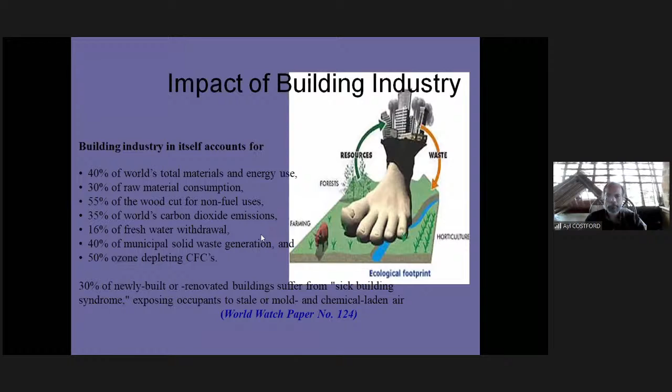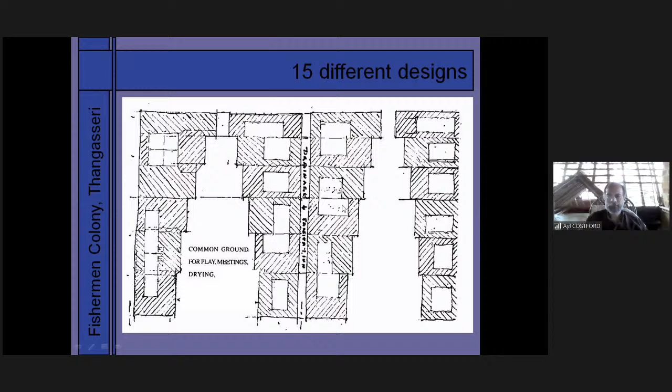We made a model. This is the model we made in small cardboard. You can see the sea here, and also all these houses are open to the sea. You can see this. And he made the first designs, and then asked us to make the models. First, he made 15 different types of houses and put it here.

This model we made in 1 in 200 scale. Sorry, not 1 in 200, 1 in 100 scale. Then he asked us to make each house in 1:20 scale. We made the models for the 15 houses.

Then we discussed with the district collector there. Actually, the project was under the district collector, and he was a very cooperative person. Laurie Baker himself came to the site, and only then he made this proposal. Then all our COSTFORD people, including interns, made this model.

Then we asked the collector to call a meeting for the beneficiaries. When the collector conducted the meeting, he called all the people. It was 158 houses, and 158 families were invited to an auditorium near the collectorate itself. Then all the people came. Laurie Baker insisted all the ladies had to participate in the discussion.

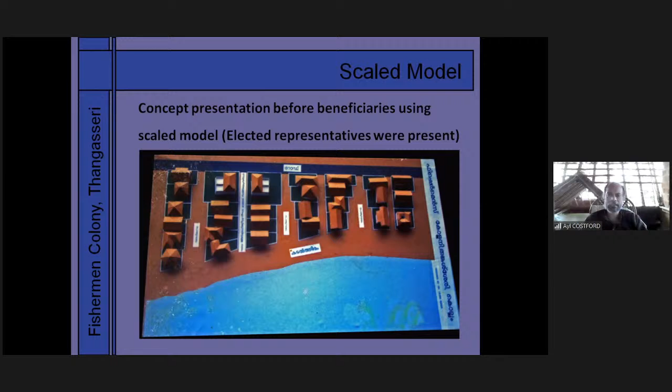Then Laurie Baker suggested some new methods of making the foundation there, because it is very close to the sea, and it is very difficult to make the foundations with steel. These were taken while the construction was going on; Laurie Baker was also visiting that area. That is the picture of that. This is a very old picture, that's why the photos are like this. I have scanned it and made use of it.

Actually, Laurie Baker proposed a bamboo reinforced surface beam. Because it's a government funded project, it would be very difficult to use bamboo instead of steel there. But Laurie Baker insisted. He wanted to collect all of them and explain what the problem is.

That time we also called local politicians and other political leaders, the member of parliament and member of legislative assembly. The collector invited all of them, they all came, and we had a discussion. We explained the advantages of bamboo and the disadvantages of steel.

I thought it would be very difficult to convince them about the bamboo. I thought they were not going to accept it. But surprisingly, when we explained to them the good qualities of bamboo and the demerits of steel, because it's being on this sea sand, you can also see the sea sand in the picture.

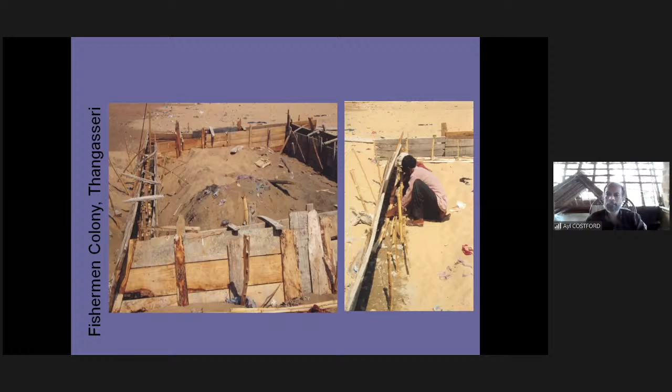And we did the entire foundation beams with bamboo reinforcement. All the clients, all the beneficiaries agreed to use bamboo there. When the beneficiaries agree, there is no question about all others. All the politicians also agreed, and we smoothly carried out this foundation work.

You can see these buildings here. We completed 158 houses there, and these 158 houses are in 15 designs. And people started living there happily. This was completed in the year 2000. It started in 1997 and finished in 2000. We completed it.

Now, these are the 2015 photographs. Many people upgraded their houses. Many of them took a first floor on top of the ground floor, and many people expanded their houses.

During that time itself, when we had the discussion with the beneficiary group, they conveyed their requirements to us. Then when they got the chance to extend, all the houses were extended. You can see the houses after 15 years of the construction.

People are using the area wherever we planned common land, and nobody encroached on that land. All of them are using it as common land. They are mending their nets there, keeping their boats there, drying their fish there. It is all happening.

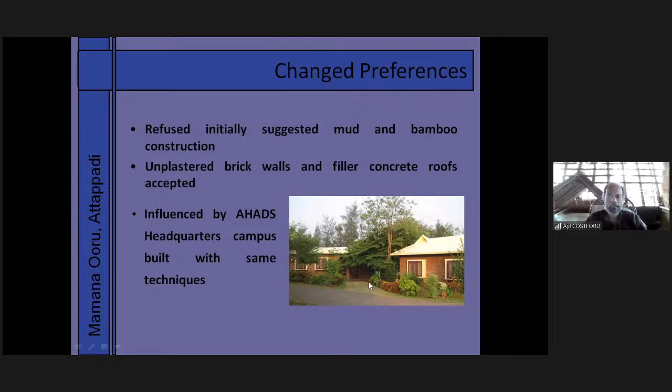And all houses have rainwater harvesting tanks in the base, in their foundation itself, in their plinth. Within the plinth itself, without doing the filling inside the plinth, we converted that into a rainwater harvesting tank and plastered it inside. And soil conservation also happened.

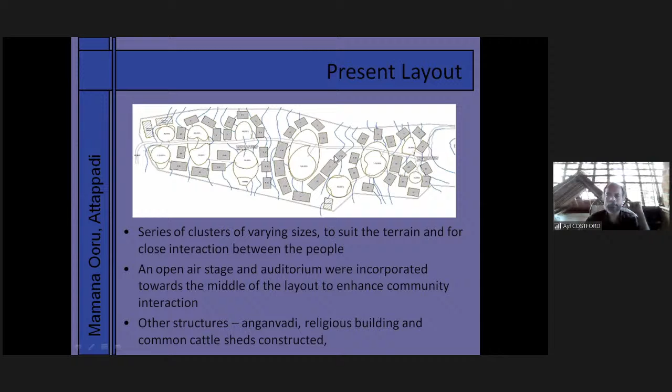A series of open tanks, and you can also see the contour lines in between these houses. It is all going up, and when this tank is full, its overflow will come to this tank. From its overflow it will come to this tank. It's like that. All tanks are fully connected. These all are the tanks. You can see this is one tank.

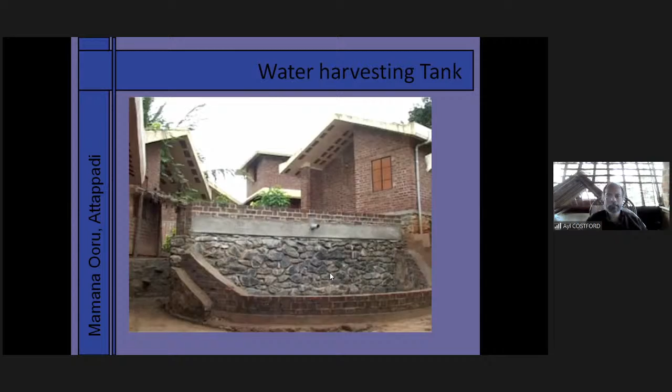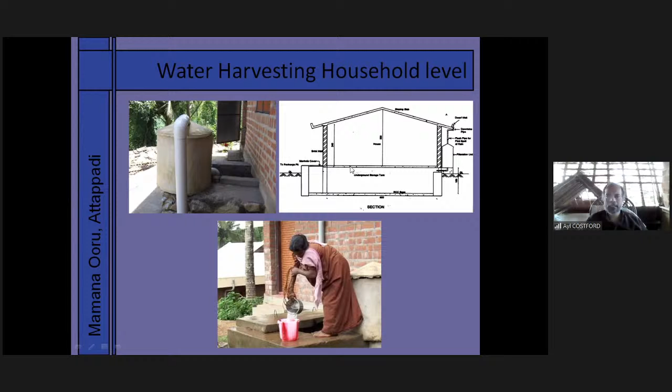This is another tank. Its overflow comes to this tank, and people are using this water. This is the underground one; this water is meant for drinking, and the exterior tank is for the other utilities. Also, you can see how we provided the rainwater harvesting tank inside this house. This is that rainwater harvesting tank.

Rainwater conservation, all these things are common things. We also provided a nutrition garden with lots of planting; we planted fruit trees also. We provided a common cattle shed, and in each house we provided a smokeless chula also. The common cattle shed was a new approach because they had to keep their cattle on the lowermost portion. This is the common cattle shed, and the owner may be living here on the top, but he need not take his cow to the end of this area. He can keep them here.

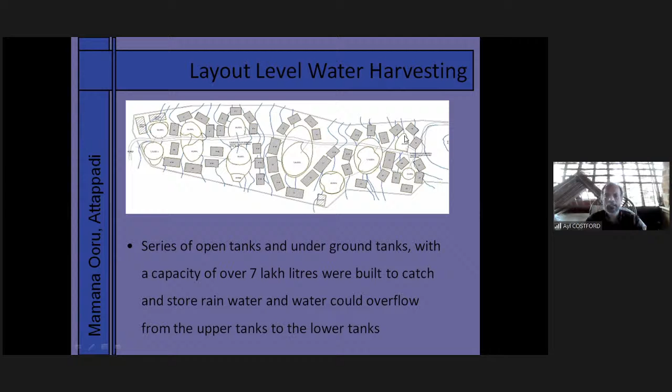The main idea was how to improve the living condition of these people. They were struggling with water. Now they have plenty of water near their home itself. Then these are the tribal hamlets. First we completed this with the fisher folks. Now tribal hamlets.

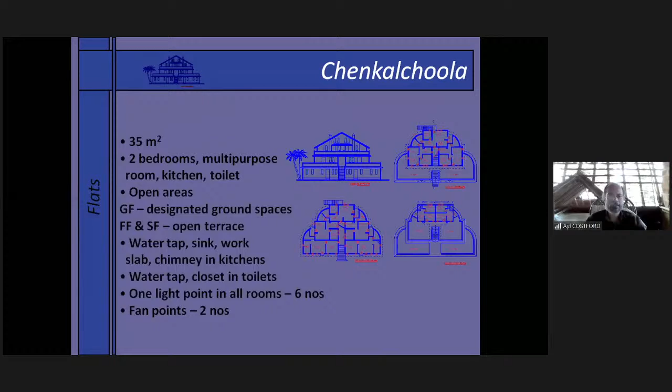The third one is the slum project, Chenkalchoola near Trivandrum. That was also in a very, very dilapidated condition. You can see the condition of the houses. This Chenkalchoola project is actually a failed project. We cannot call it a successful project. We completed the houses. You can see this. Laurie Baker designed the house. This is actually Laurie Baker's design. We completed it.

It's a stepped design. You can see on the ground floor it is 5 houses. Then on the first floor it is 3 houses, and on the second floor, another two houses. This is the system of the houses. In total, one unit is 10 houses. That was the design. The first floor people can make use of the terrace in front of them. Both can make use of the terrace. And on the second floor also, those people get terraces in front.

This is also a Laurie Baker concept, because people who live on the ground always prefer to live on the ground. They don't want to go up. When we approached them with this suggestion, they accepted and started living in these houses. But actually, there was not much interaction with these people. Wherever we don't have interaction with the people, the project will not go. We cannot call those projects very successful.

Still, after completing these buildings, many anti-social people just barged in. Nobody allotted these houses, but these anti-social people just barged in, and we could not do anything for that project. That's why we call it a failed project. You can see this. They are not keeping these houses very clean. Also, you can see posters everywhere on the house itself.

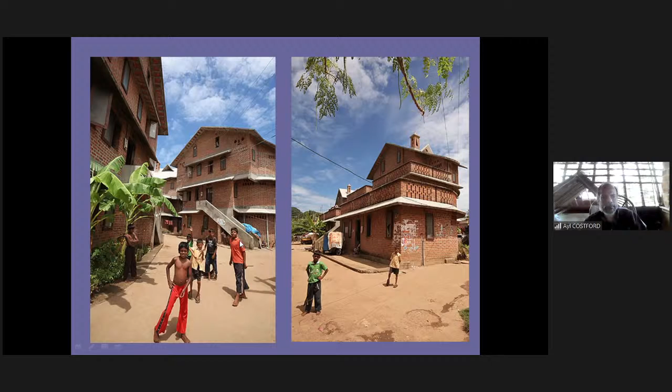In front of the house also, they are not keeping this well over there. When we got the chance to do the second slum, we got a chance to design 26 slums in Trivandrum, and we decided to take up this project, this Karimadom colony, as a part of our direct execution. All the other slums we designed, and others were doing it. And this one we decided to do ourselves.

Its total population was 2,341. And Laurie Baker made a small concept on how to eradicate slums. "Are Slums Inevitable?" was the book's name. He made a small booklet on it. That was in 1996; COSTFORD published that booklet.

Very, very poor condition. 565 families were there. And don't compare the North Indian slums with the Kerala slums. Kerala slums are very small in size, but the conditions are very poor. Size-wise, they are very small.

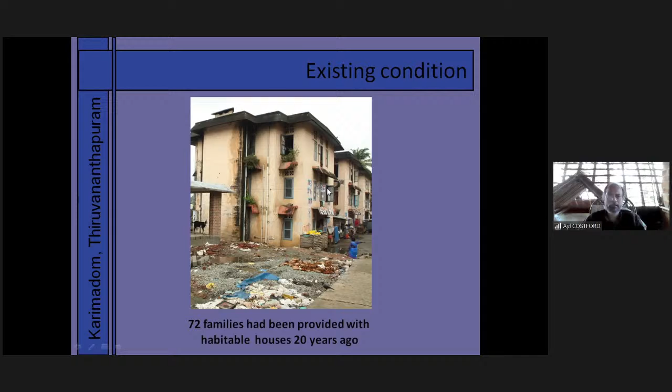Now this building is also demolished and new houses constructed. It was provided in 1985, but that is also in dilapidated condition. And there was a sewage pond, which is under the custody of Kerala Water Authority. They were the custodians of this pond.

The total area of this slum was 9 acres, and out of these 9 acres, 2 acres was used up by this pond. In our detailed project report, we decided to conserve this pond, clean it and make use of it for other purposes. And we designed the houses around this pond. That was our conceptual design.

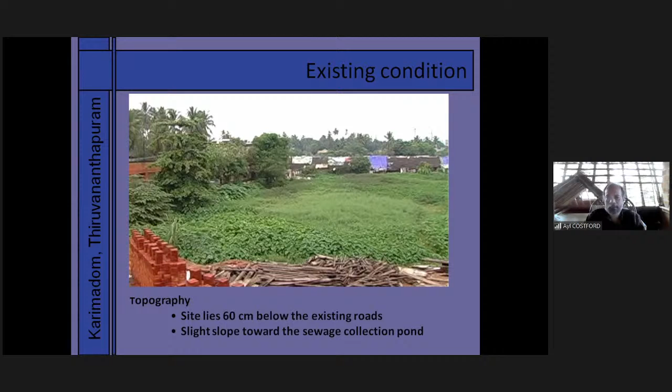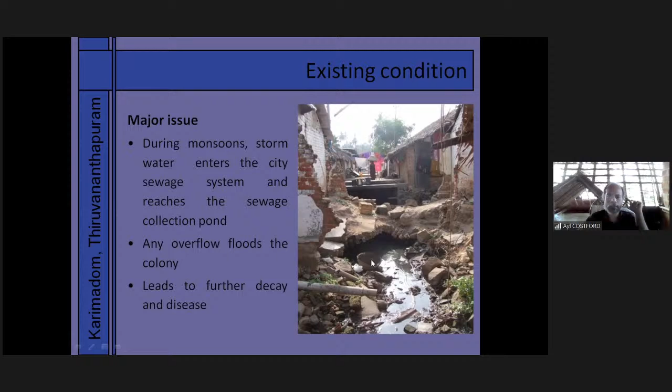And this is another issue. All the sewage is open sewage, and it was flowing through the middle of this entire slum. That also we have to cover up. And these are some of the pictures from our Laurie Baker booklet. This one, a 20 dwelling unit, 4-story block, we designed from these sketches. In the sketches it is all on one side; we made it sloping on both sides.

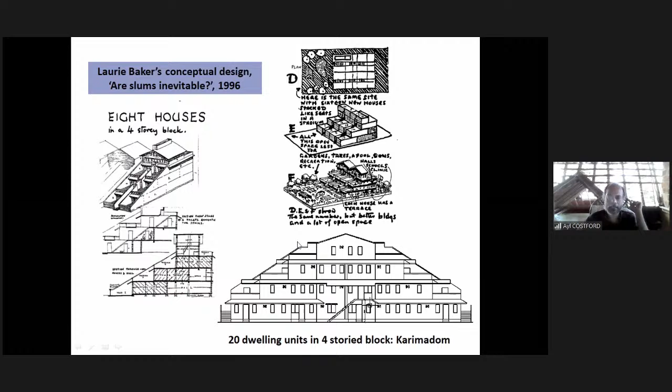This was the design. Here you can see the staircase goes through the middle from both sides. On the ground floor, there are 8 houses. You can see one house here, another house here, another here, another here. Total 8 on the ground floor, 6 on the first floor, 4 houses on the second floor, 2 houses on the third floor. Total 4 floors, G plus 3. That is the total design.

The staircase goes through the middle and joins up at the front, so the people on top can use the staircase from both sides. That was the design. Another advantage is, on the ground floor, these 8 houses can make use of the ground area. On the first floor, the people in the middle portion will not get an open terrace. They have staircases from both sides.

And these people will get the open terraces on the front. And these people also will get the open terraces on the front from both sides. This is the idea of providing it, because if these people do not get an open terrace, then the demand from their side also arises.

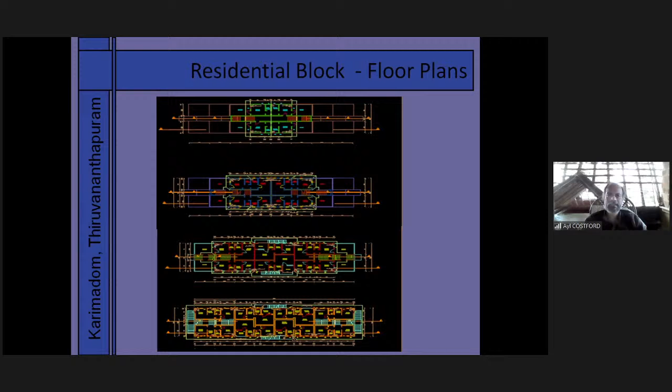Then we presented this and we took them in confidence, and they took us in confidence. Then we were able to start the project. The project was included in the JNNURM scheme, Jawaharlal Nehru National Urban Renewal Mission, under its subcomponent BSUP, Basic Services to Urban Poor, and we started the construction in 2010.

And this was the layout. You can see this drainage pond here, and the housing layouts also. Each block has 20 units of houses. This was the first phase we decided to demolish and start, since comparatively fewer people were staying in that area, only 40. We asked them to move, the committee decided, they moved, and we demolished that area and constructed 80 houses there, along with a small Anganwadi and a market. Then these 40 people came back and started living here.

Then we managed to take up the houses from this area, and the second phase was this portion. We demolished the houses in this area, and since only 40 families were from this area, another 40 families who were willing also moved into it. I found it very difficult because when people moved into the new house, they wanted their original neighbors to be their neighbors.

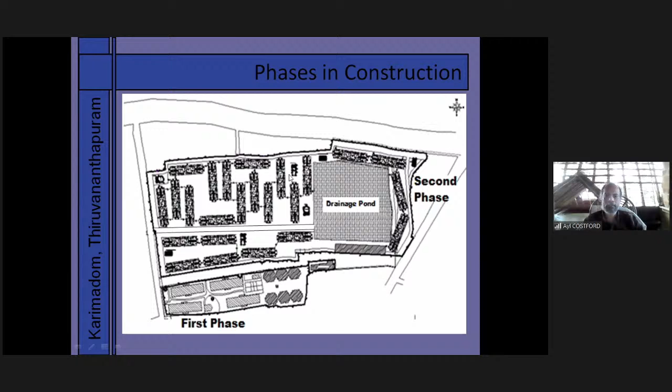The people from this area did not want to move to that area at all. They gave us the plan for the construction and moved to a community hall that was available and stayed there. We completed this portion, and they came back and started living in this area. And now the first, second, and third phases are completed.

The total of our work was this: preliminary survey, preparation of preliminary design, and 3 days of continuous discussion with the families. All families attended, and we gave them the dates for the meetings. It was a very Herculean task, but we completed it. We also provided all these facilities, like the study center, because the total area of each house was 370 square feet.

The families also raised that their men come home after work, and they used to drink also. After drinking, when a father comes to the house, the kids cannot study. We saw that too, and we proposed a study center, separate for girls and boys, where the girls and boys can go at night.

They can study there. And also the Anganwadi: in the daytime that will be an Anganwadi, but in the evening and in the morning it can be a study center. A multi-purpose open space was also provided. All these things we provided. And another major item was the rejuvenation of the pond.

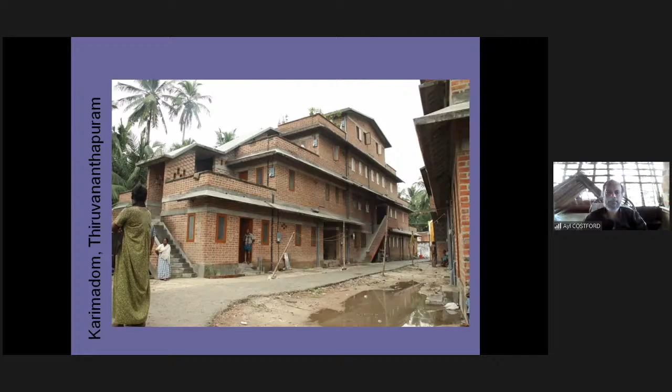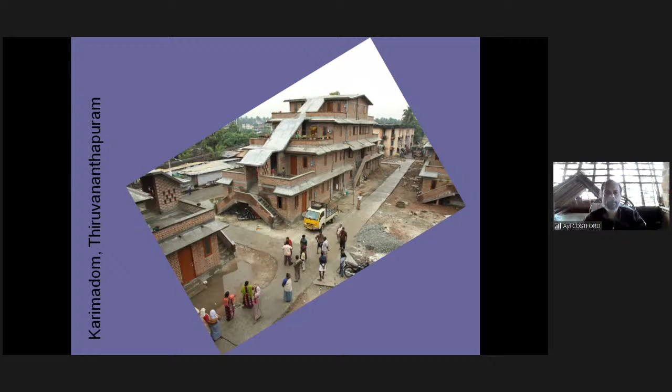From this photograph, I think you will be able to make out the designs. On the upper floors, people have different open spaces in front of their house, which can be converted into a small garden. They also planted lots of things in the yard, and lots and lots of trees.

And the fourth one, or maybe the fifth one, is also an IASC campus. These two people approached Laurie Baker in 2005, and Daddy was not well enough to take up that project. He asked them to approach COSTFORD, then they came to me and we designed it. During Daddy's time, he propagated mud, but he managed to do only one project with mud, in Tamil Nadu, not in Kerala. But he very much wanted to construct a mud structure.

He wanted to do mud buildings, but he did not want to use any cement stabilized mud. He wanted to make use of our traditional mud wall techniques. He wanted to use cob, adobe, but without adding embodied energy with things like cement as a stabilizer in the mud.

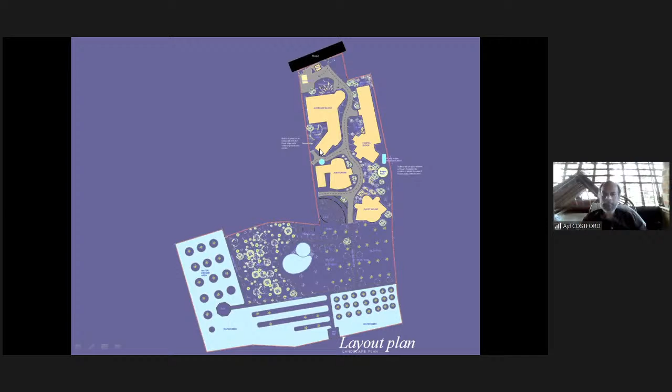This is the layout. This portion is the lake, and from the lake we have to leave 40 meters. The Panchayat had made some suggestions for that, and they put up a 40-meter barrier in front of the lake. No construction in this area, and our constructible area is limited to only this portion. Then we discussed with the client and proposed some plans. These are the designs which we proposed.

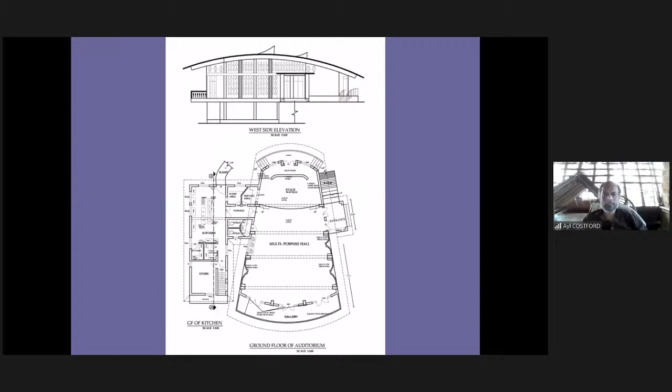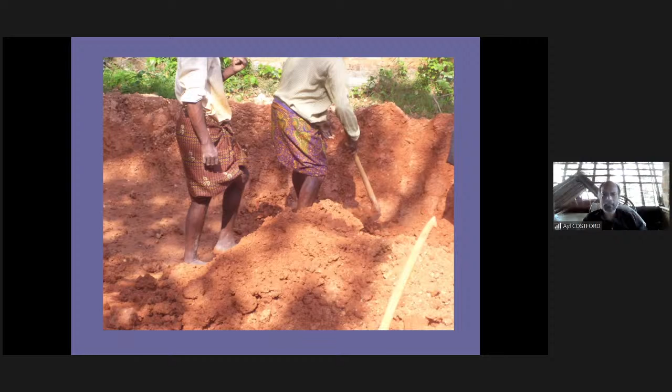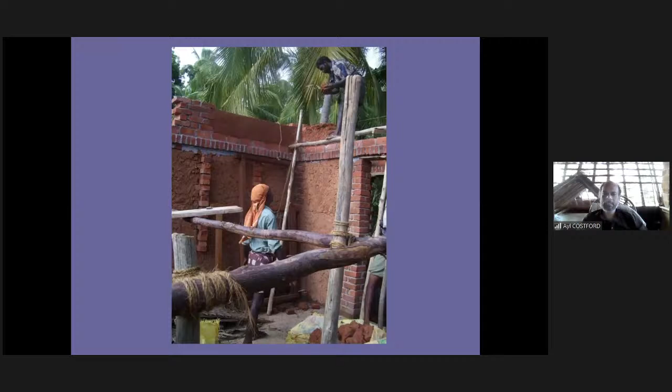We decided on mud construction. The client was also very well aware of it, and they wanted mud construction. We used the cob method. There is no cement in it. We constructed it with mud, and also used filler slab for the roof, as you can see.

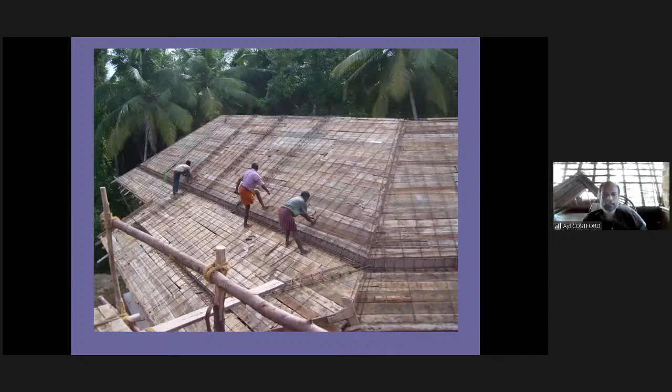Maybe this is the biggest mud building in Kerala now. Lots of mud buildings are here, but they all have cement in them. These buildings don't have cement in them. It's actually the original traditional cob method without any cement.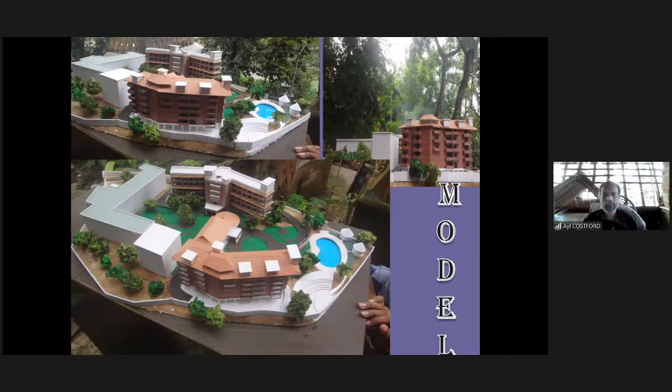Another set of buildings at the Institute of Management in Government. This is also on the top floor. It is a Casuarina pole roof and also mud walls. Mud was taken from the site itself. Another building on the same campus.

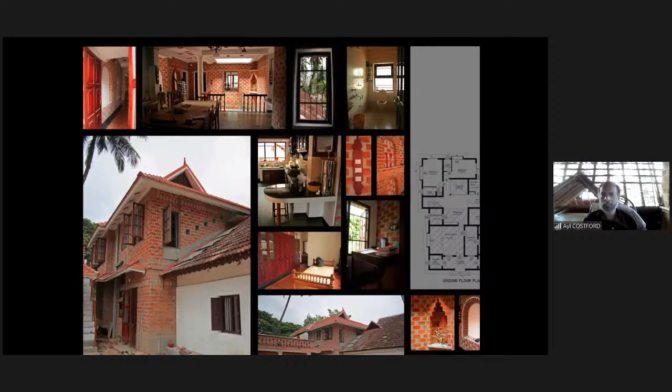These are some of the residential buildings at Trivandrum. You can see this is an extension of an old house, which is 120 years old. We did not want to demolish it. We retained it, restored it, and constructed a new building next to it. Another house. More than 2,000 houses we constructed in Trivandrum alone.

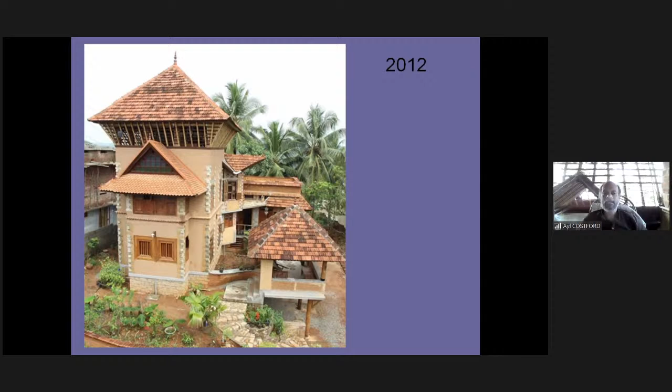Now I am talking about not only the technology, but the approach. This was in 2012. There were no trees, nothing. We just planted them. Laurie Baker taught us the house is not only yours. Lots of other things can also come and stay around you. Need not be with you, but around you. Not only human beings, others. We planted trees.

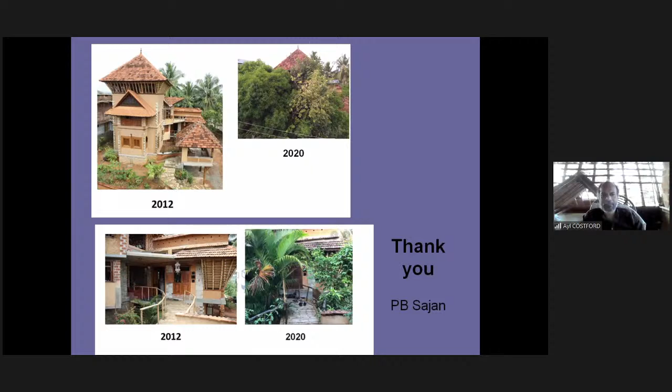It was really nice to see the journey, and it's also there in the title you have given this talk, Lessons from Laurie Baker and Beyond. To be very honest, in my journey and experience so far I've seen lessons from Laurie Baker, and today it was really heartening to see how COSTFORD has taken that journey forward, and a lot of new things that I saw for the first time.

Of course, I have visited your house, but there was a lot of other material exploration in terms of bamboo. Mud is something that has happened in the post Laurie Baker era, and that evolution was honestly something that I've come across for the first time. Really good to see that whole presentation. So I would like to thank you for that.

And your house has really grown up, and even in this presentation, we could hear lots of varieties of birds in the background while you were making the presentation. Yeah, lots of birds are around. So not only you are living, but now a lot of other people have already come and joined in your house. So I have some questions, and it all depends. If you have the time, then we can take some of those questions.